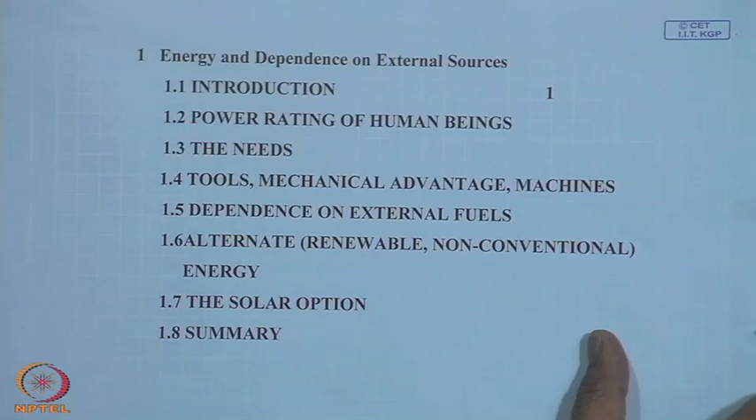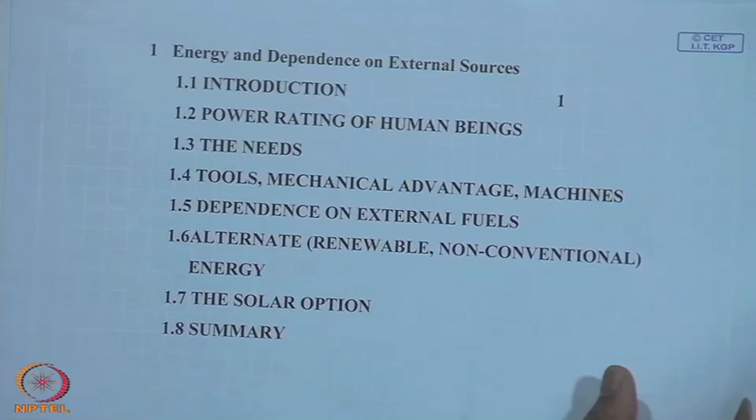Similarly, we define what is meant by alternate, renewable, or non-conventional energy sources, of which solar energy is one option, and why it is promising. We shall have a bit of justification for going through this course and this material, and that is the summary of the first lecture at the end.

So this gives a historical perspective of the oil energy crisis in 1973. It is, in one sense, an energy crisis and an oil crisis, but more a crisis of prices, because the OPEC countries increased the price of fuel, and particularly America and other countries that heavily import oil started feeling the need to develop alternate sources instead of depending only on conventional fossil fuels.

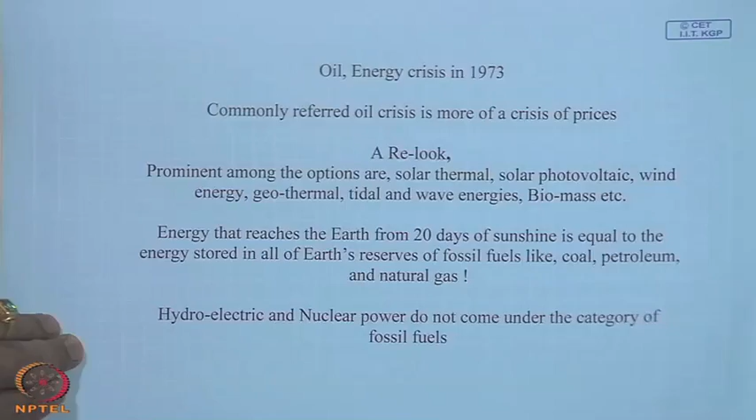Prominent among the options are solar thermal, solar photovoltaic, wind energy, geothermal, tidal and wave energies, biomass, etc. All these were given attention by scientists and engineers. An interesting fact is that the energy reaching earth from 20 days of sunshine equals the energy stored in all of earth's reserves of fossil fuels like coal, petroleum and natural gas. Hydroelectric and nuclear power do not come under the category of fossil fuels, though they have a good share in meeting world energy requirements.

So the crisis is sort of man-made. The best estimates of available reserves tell us they will last 20 or 30 years, though estimates widely vary. This could depend on how much the rate of consumption continues to increase, or whether we decrease our consumption rates by alternate sources or by conservation, leading to a reduction in dependence on fossil fuels.

So there is an intrinsic reason for dependence on external energy sources to meet human needs: food, shelter and clothing. The typical power rating of a human being, for an athlete in a 100-meter sprint, is about 1200 watts, which comes to about 1.6 horsepower. An average human can sustain working for longer duration at about 300 to 500 watts at best.

A quick estimate of the energy required to produce the material needs like food, shelter and clothing of a human being exceeds the energy that he himself can produce in trying to produce whatever he needs.

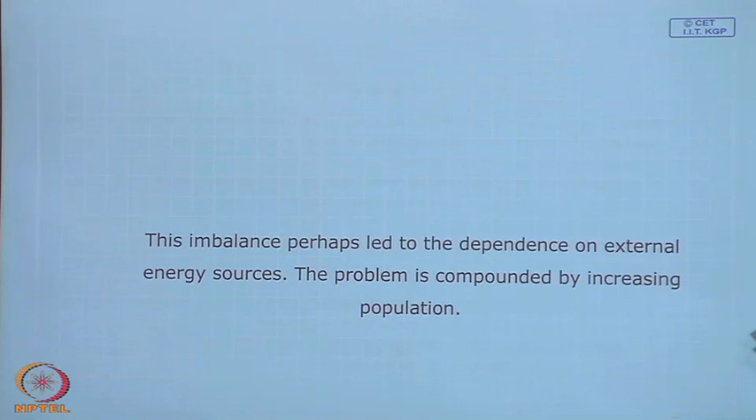Consequently, there is an imbalance. This imbalance perhaps led to the dependence on external energy sources. The problem is further compounded by increasing population, because we have got limited sources and a larger number of people dependent upon that. So consequently, instead of producing this himself, he had to use some power, animal power, machine power.

To make life a little more comfortable, first he invented fire, which made him feel more comfortable even in a cold climate, and also to ward off wild animals. Then subsequently he started using fire for what we call in modern terminology as heat treatment. Then various tools have been invented for use of convenience, including killing animals or protecting himself, up to mass destruction weapons of the present day.

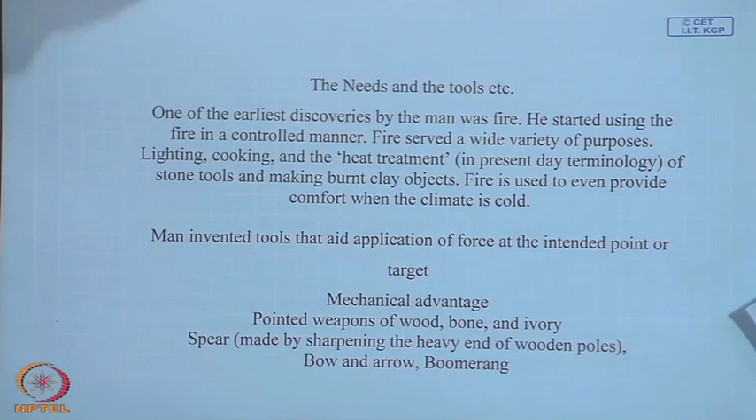And in this process, mechanical advantage has been harnessed. In other words, if you have got the lever principle, you can take a crowbar and lift the earth, provided there is a space to stand and a strong enough foundation to hold the bar.

So pointed weapons of wood, bone and ivory, then a spear made by sharpening the heavy end of wooden poles, bow and arrow and boomerang are the very early tools and weapons that man was using.

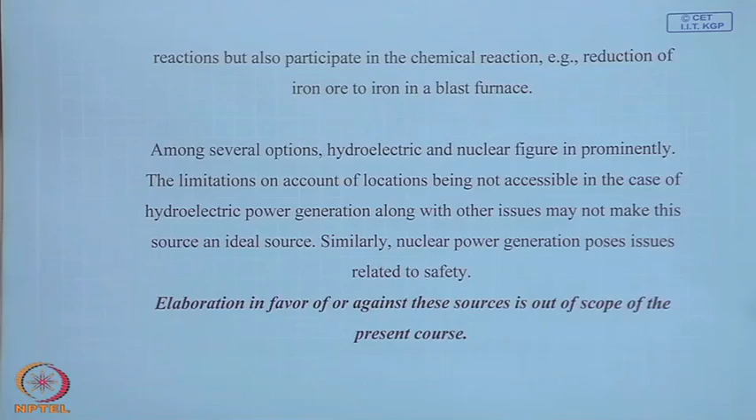This I am particularly mentioning to point out that if the dependence on coal for power generation is reduced, it will be available for a longer period for producing iron and steel. Consequently, there will be a chance to think of new technology which may not depend on coal for producing iron and steel or any other product one can think of.

So hydroelectric power generation and nuclear power strongly occupy a pretty important role. However, they are not easily accessible, not easily available at the location that you need, and there are issues like submerging of the surrounding areas and safety issues as far as nuclear power is concerned.

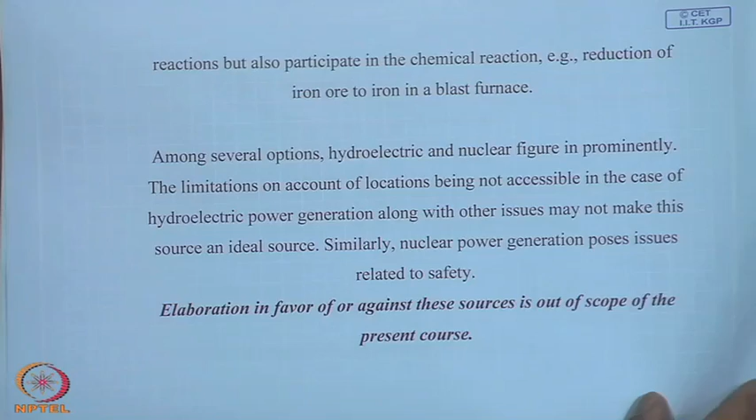Elaboration in favor or against these sources is out of scope of the present course. We will not enter into a debate whether nuclear is better, or hydroelectric is better, or solar is the only option as far as this is concerned. But we do consider solar to be one of the options in trying to reduce the dependence on fossil fuel.

Another approach is to make the processes and machines more efficient and reduce the losses of energy. This aspect may broadly be termed energy conservation, which also involves energy management, waste heat recovery, etc. By this method, if actual dependence on fossil fuel consumption becomes less, then the resources last longer.

It is not essential that you add power generation, but you have reduced your consumption by alternate or efficient means. In fact, I shall give you one example. In the early 80s, any two-wheeler giving something like 40 kilometers a liter was considered a very highly efficient machine, whereas now it goes to 80 to 100 kilometers per liter with the same, or even more, power and comfort. This is because of the direction that research has taken in trying to reduce consumption.

Consequently, you can run two two-wheelers instead of just one two-wheeler as earlier.

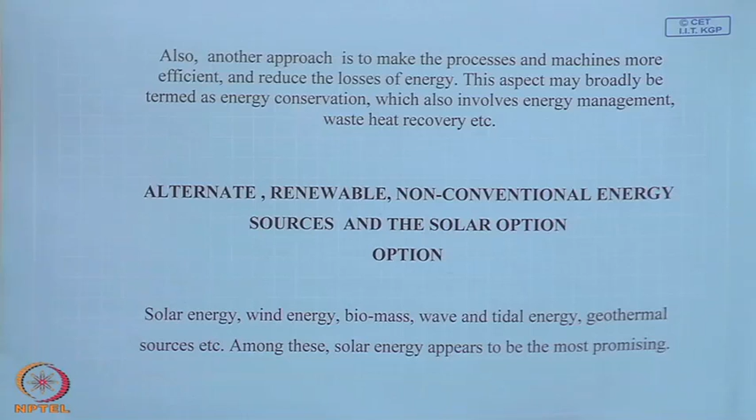Solar energy, wind energy, biomass, wave and tidal energy, and geothermal sources are some of the things being actively considered. Among these, solar energy appears to be the most promising.

It is not that we are giving this course and hence we vote for solar. The distribution of solar energy throughout the world is more or less uniform - it does not favor a rich country or disfavor a poorer one. The second part is it can be fairly predicted. I may not be able to guess the solar radiation tomorrow morning at 7:30 to 8:30, but a pretty good average for a typical day in August can be predicted, calculated, or measured.

Whereas wind energy is more erratic, and at the same time it is mostly available at places that are not easily accessible. Wind energy is a manifestation of solar energy, approximately about 2% of solar radiation. But we should also note wind energy is a high-grade energy source, since it directly provides mechanical power from which you can generate electricity. So wind can also play an important role in meeting energy demand and reducing dependence on fossil fuel reserves.

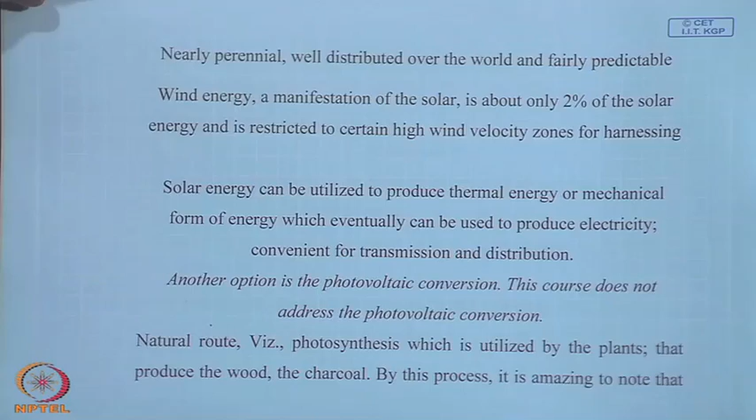Solar energy can be utilized to produce thermal energy or mechanical energy, which eventually can be used to produce electricity - which we take for granted these days because of the convenience in transmission and distribution. If you generate mechanical shaft power, you can't transmit it more than 100 feet even with a very long shaft. Earlier, old workshops used to have a common shaft to which a number of lathes or machines were connected. So that type of thing one cannot think of for kilometers and hundreds of kilometers of distribution.

In the solar route, photovoltaic conversion also exists, where solar radiation is directly converted into electric energy. This course does not address photovoltaic conversion. We will restrict ourselves to solar thermal energy and the various ways of producing thermal energy, mechanical energy, or electric energy.

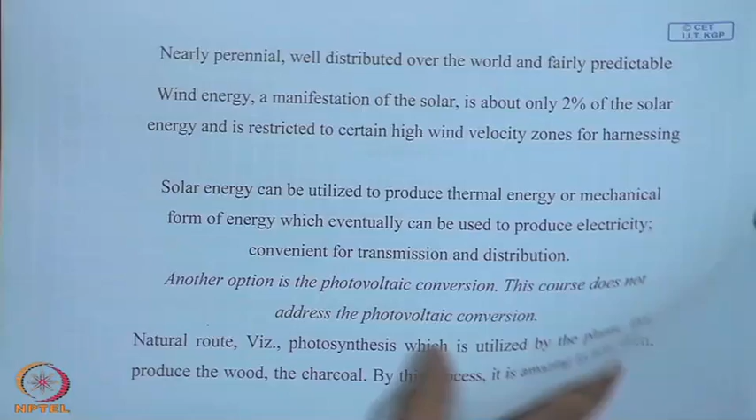The most natural route was photosynthesis, which plants do fairly efficiently - essentially a method of storing solar energy in the form of wood. I was told, and read, that one of the iron and steel companies in Bhadravati in present-day Karnataka ran a blast furnace using charcoal produced by a forest grown around it. The forest area was about 7 acres, and the blast furnace capacity was 500 tons, which is small by modern terminology. Nevertheless, it showed that you cut about 100 trees, plant 100 trees, and with a cycle time of about 5 or 6 years, they become ready for use again.

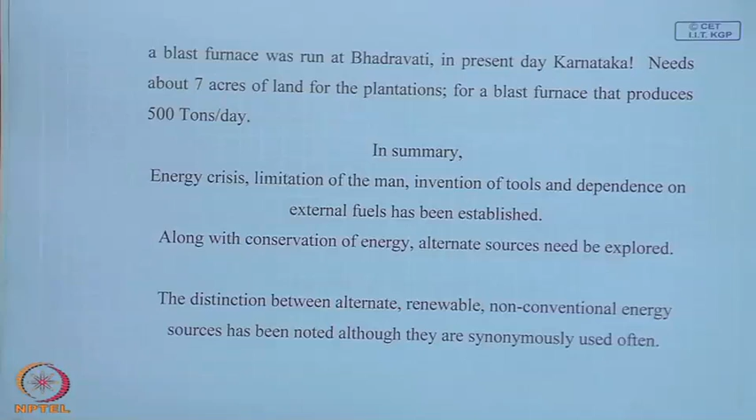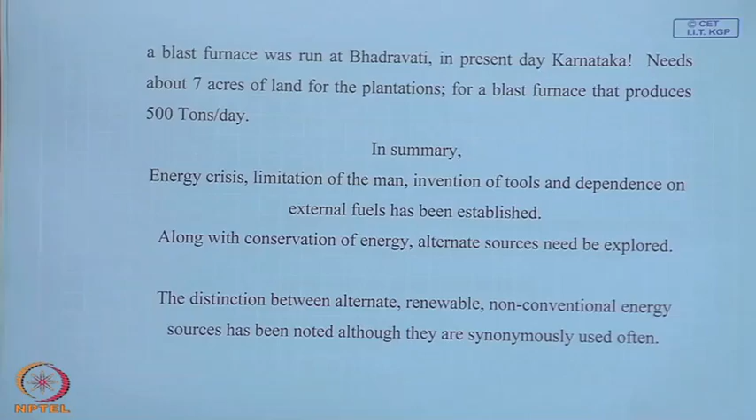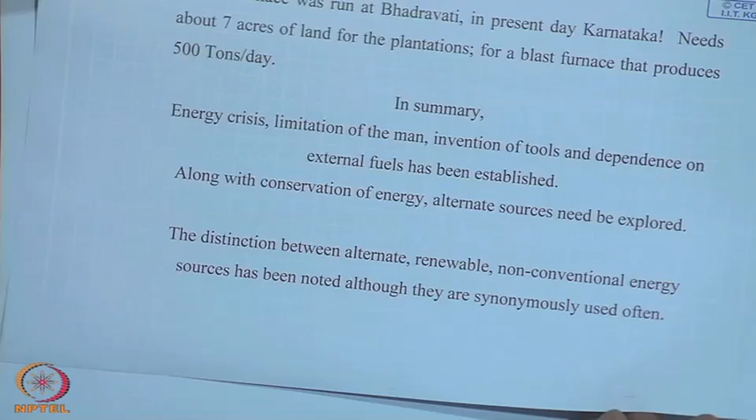So in a way, we might summarize by saying that the energy crisis, the limitations of man, the invention of tools, and dependence on external fuels have been established. Along with conservation of energy, alternate sources need to be explored. The distinction between alternate, renewable, and non-conventional energy sources has been noted, although they are used synonymously many times.

So at the end of this lecture, what we can say is solar energy appears to be a promising option, and this course deals with solar thermal energy generation and utilization.

So, the next lecture will be a shorter one. We shall try to provide the sun's physical description and reactions.

There is a good case to reduce the use of fossil fuels and explore alternate energy sources, and solar seems to be a good option. From a thermodynamic point of view, in no process is energy consumed or lost; the form of energy changes from one form to another. Only the quality or grade of the energy deteriorates.

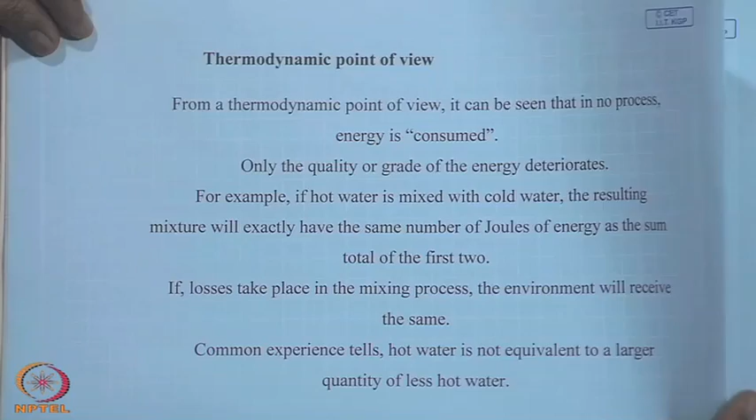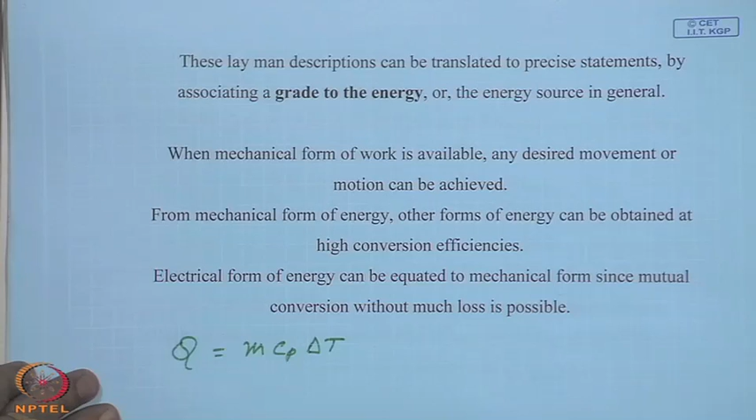Common experience tells us hot water is not equivalent to a larger quantity of less hot water. If you calculate m into specific heat Cp into delta T, where temperature is with respect to some reference temperature, Cp is the specific heat, and m is the mass of the water, I can convert this into less cold, less hot water containing the same amount of joules, with m increased and delta T decreased.

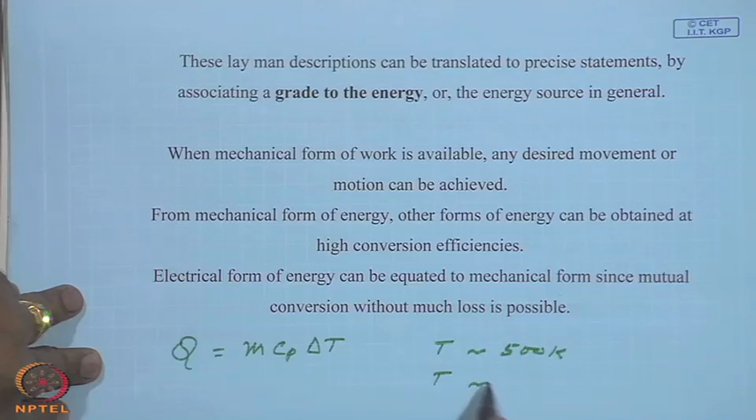But at the same time, if I have T at 500 Kelvin, the capability of the hotter fluid is higher in converting into mechanical energy rather than that of the colder fluid.

So whatever we are saying as less cold and more hot, these layman descriptions can be translated to precise statements by associating a grade to the energy source. We might qualify them as high grade or low grade sources. Wind energy is a high grade source, hydroelectric is a high grade source, and nuclear, though it is a thermal route, is also a high grade source, because the temperature at which the reaction can be maintained or steam raised can be very high. Now if you look at solar energy, it is typically a diffuse source of energy.

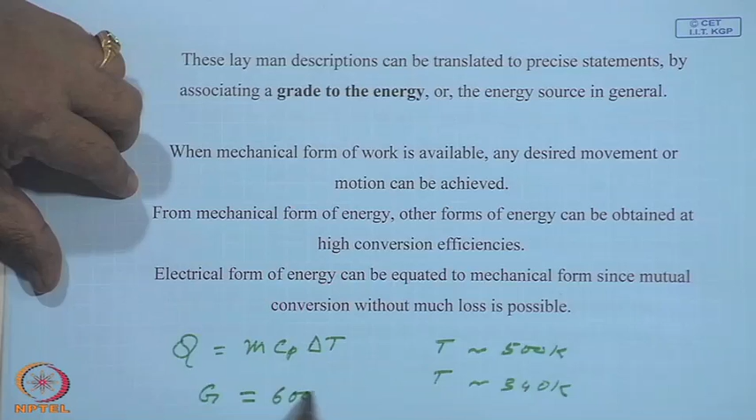You may have G of about 600 to 900 - the intensity of solar radiation that you receive typically during the better part of the day, not early morning, not cloudy days: 600 to 900 watts per meter square. Multiplied by the surface area of the earth, it is quite a lot, but 600 watts is small; typically a boiler will have about 3000 watts per meter square of heat flux. So compared to that, this is only 1/5 or 1/6, and in addition you have intermittency - it will not shine all 24 hours.

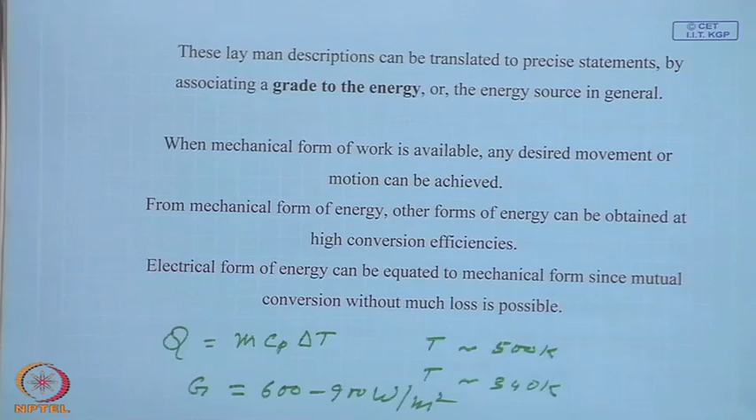When we talk about mechanical form of work, most of the time any desired movement or motion can be achieved in the direction that you want. If you have shaft work, I can make it move a wheel, or move another reciprocating mechanism and produce an ordered, directed movement. From mechanical form of energy, other forms of energy can be obtained at high conversion efficiencies.

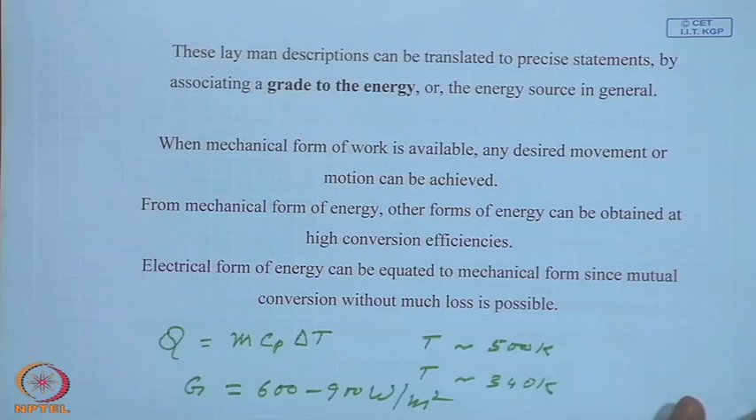Now, why we talk about mechanical form and not just thermal form is that once you have mechanical energy, you can produce electricity with a reasonable efficiency of 90 to 95%. Once you have electrical energy, mechanical energy can again be produced with high efficiency, and also thermal energy at the temperature you desire can be produced at high efficiency. But the reverse is not true.

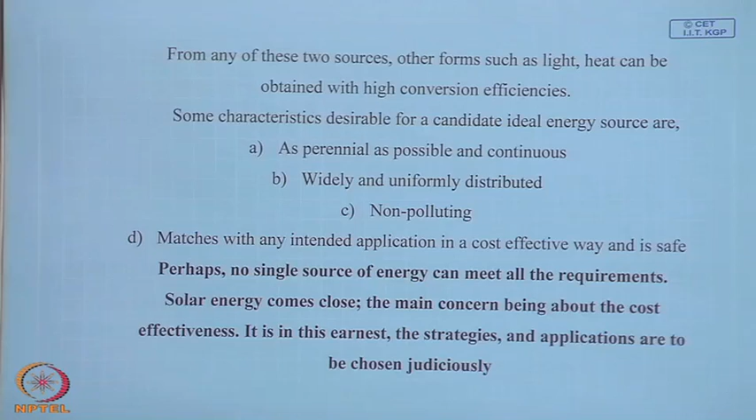So now if we ask ourselves what are the ideal characteristics that we would like to have for a new energy source: we would like it to be as perennial as possible and continuous, widely and uniformly distributed, and non-polluting. By being perennial, as long as man exists, the energy will be available. If it is continuous, I do not have to store the energy in any form. And if it is widely and uniformly distributed, I can set up a power producing plant anywhere I want.

It should also be non-polluting, which is a serious issue these days with the number of vehicles increasing and power generating units increasing.

The other thing you would like is that it matches any intended application in a cost effective way, and that it is safe. So if I want to produce, say, hot water, what is the cost of the hot water produced if you use solar? Similarly, if I want to generate mechanical or electrical power, what will be the cost of the system? Because the moment we talk about electric generation, you go to a higher temperature source, and that may be less efficient from a heat losses point of view. Consequently, the cost will be entirely different compared to using a solar collector just to heat water up to 60 degrees centigrade.

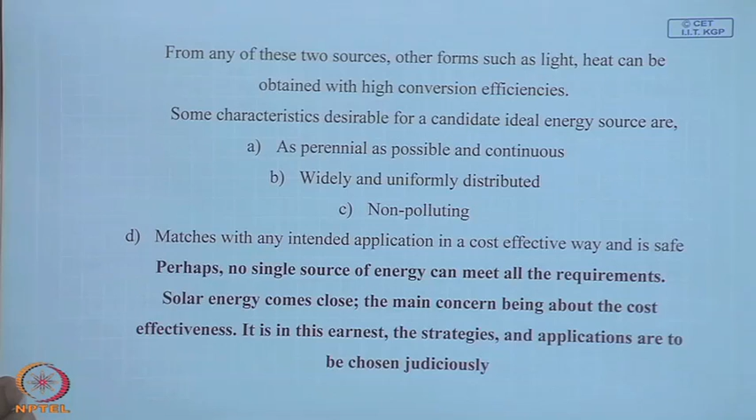For example, if you take a tropical climate like India, water heating is not a burning problem, in the sense that you would like hot water only for 3 or 4 months in winter. Most of the time you need cooling instead, which is again a high grade application if you try to provide air conditioning.

Whereas if you go to a cold climate, typically at high latitudes like the northern USA or Canada, the ambient temperature is about 10 or 11 degrees, or even sub-zero. So if you want to provide a house at 20 degrees C and water at the tap at 20 degrees C, it requires a lot of heating from the ambient temperature, which is normally set by the government as the mains temperature. Unfortunately this type of application we cannot have everywhere, but there may be other fortunate applications where heating is not the problem, cooling is the problem.

We will come back to this in detail towards the end of this course. A lot of solar energy research has gone on during the last 3 decades, with some demonstration plants being successful and some not so successful, including applications like water heating, the greenhouse effect, and solar cookers, which are all popularly used.

At the same time you have to be concerned about why solar energy is not being widely used in all parts of the world. One issue is that if you look at the type of work going on, people classify it sometimes in a light-hearted manner as 'solar' application and 'non-solar' application. That means you use solar energy for generating energy, which you call solar.

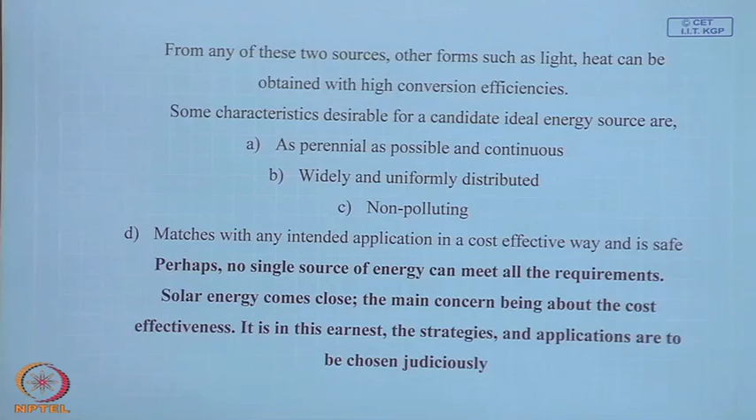Another simple example is cold storage. Ideally a cold storage is maintained at a certain temperature, and if you can reduce the solar radiation falling on it by choosing the length, width and height dimensions properly, that serves the purpose.

Say for example, the height should be a minimum of 6 feet, whether it is south facing, north facing, or whichever side has more area. Thereby, you can reduce the total amount of solar radiation received by the cold storage, and thereby reduce the cold storage requirement on the air conditioning or cooling load.

So some of these calculations have become available with the advent of better methods and better algorithms.

A little bit about the sun.

The sun may be considered as a sphere of intensely hot gaseous matter with an average diameter of 1.39 into 10 to the power 6 kilometers, and it is at an average distance of 1.495 into 10 to the power 8 kilometers from the earth. The sun is in effect a continuous fusion reactor, and we on earth try to simulate fusion reaction, but unfortunately the success is limited because we cannot contain the high temperature plasma in the containers of materials known to us.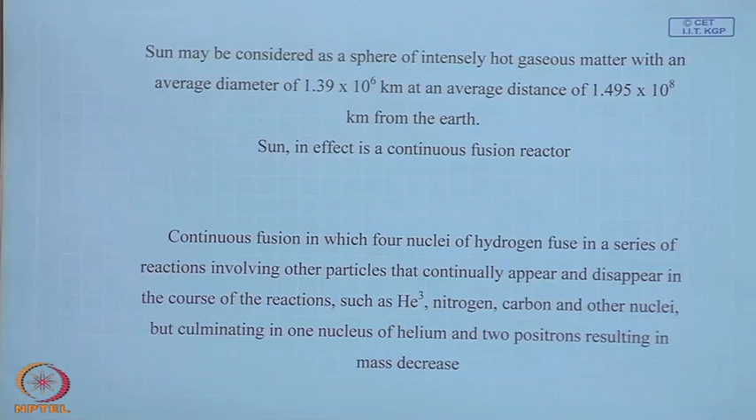In the continuous fusion, 4 nuclei of hydrogen fuse in a series of reactions involving other particles that continually appear and disappear in the course of the reactions, such as He3, nitrogen, carbon and other nuclei, culminating in one nucleus of helium and 2 positrons, resulting in a mass decrease.

So when this fusion reaction occurs, there is a reduction in the mass, and that reduction in mass is converted into energy.

About 0.0276 atomic mass unit of mass deficiency corresponds to 25.7 million electron volts. The name is very profound, million electron volts, but the quantity of energy denoted by MeV is actually very small.

The heat produced in these reactions maintains temperatures of the order of several million degrees in the core and serves to trigger and sustain succeeding reactions.

One atomic mass unit is, for your information, 1.6604 into 10 to the power minus 24 grams, and the rate of conversion is according to Einstein's relation E equals mc squared, where c is the velocity of light, 2.998 into 10 to the power 10 centimeters per second.

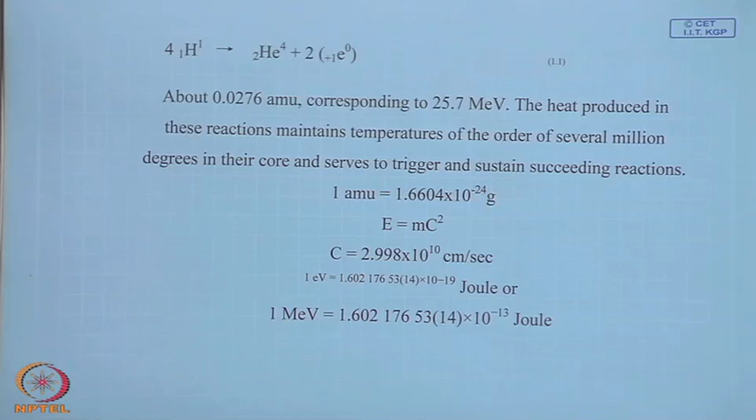One electron volt is of the order of 10 to the power minus 19 joules, or 1 million electron volt is of the order of 1.6 into 10 to the power minus 13 joule. So the so-called million electron volt is a very small amount of energy.

However, the fusion reactions or fission reactions in nuclear reactors occur plenty per second, producing sufficient energy.

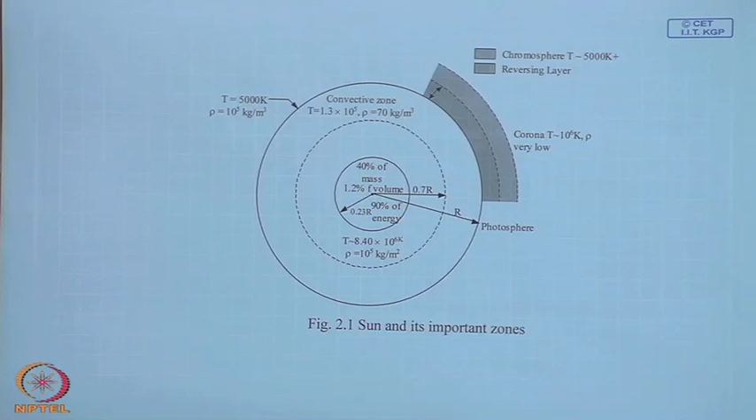This is a schematic representation of the sun. About 90% of energy is produced within 0.23 of the radius, occupying about 1.2% of volume, but containing 40% of mass at the center. There is the corona, a reversing layer, a photosphere, and a convective zone, and effectively the sun is at about 5000 Kelvin.

In other words, it is not that we have measured the temperature by any thermocouple or thermometer taken near the sun, but effectively by virtue of the solar radiation received on earth, if you back-estimate, the effective temperature turns out to be 5000 Kelvin.

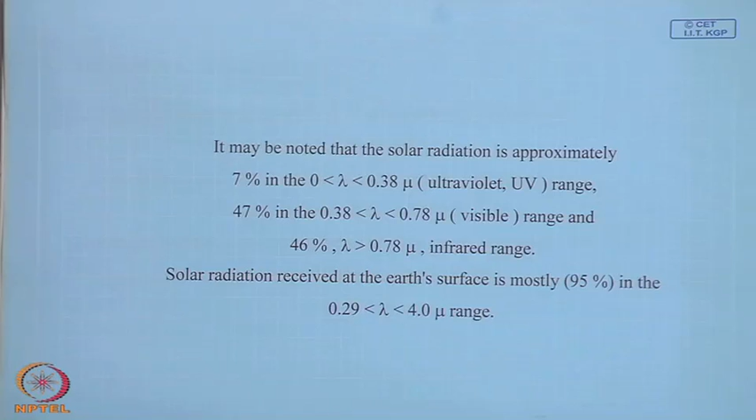7% is between 0 to 0.38 microns, which we popularly call the ultraviolet, and about 47% is in the range of 0.38 to 0.78 microns, the visible range, and about 46% with lambda greater than 0.78 microns is the so-called infrared range. Solar radiation received at the earth's surface is mostly in the wavelength band 0.29 to 4 microns.

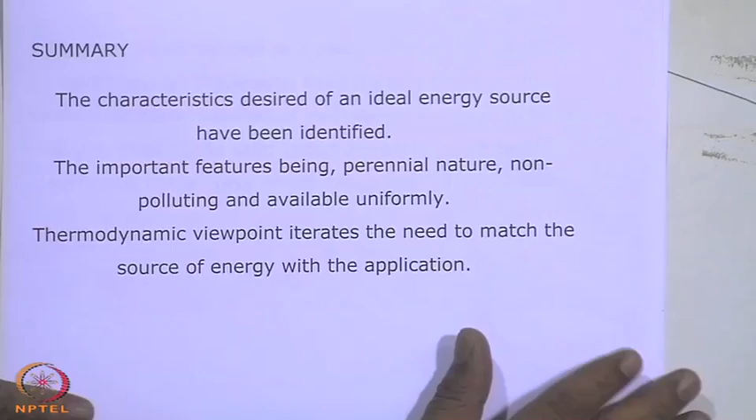Interestingly, this visible range is what is utilized by photovoltaics. So though photovoltaics produce direct electric energy, only part of the solar radiation spectrum is available for it to convert into energy. That is one thing we have to take into account when we calculate the efficiency of a solar energy device working on the photovoltaic principle.

So what we have done in this part is give a little glimpse of what the sun does. It is basically a fusion reaction producing energy in a particular wavelength range, and what we receive on earth, and the characteristics desired of an ideal energy source have been identified. The important features being perennial nature, non-polluting, and available uniformly. The thermodynamic viewpoint iterates the need to match the source of energy with the application.

So this I have not elaborated, but it will be interesting to know how many of you know at what temperature you take your bath, hot water bath.

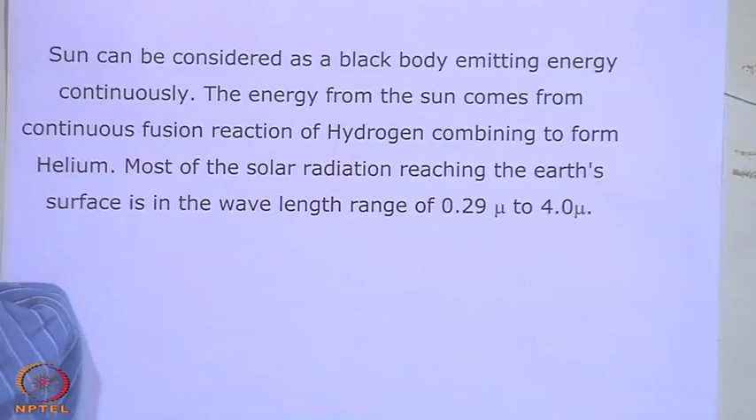I know previous classes people came out with answers ranging from 50 degrees to 60 degrees to 45 degrees. But the fact is you use about 5 to 6 degrees above body temperature, 41 to 42 degrees centigrade, and the skin cannot sustain more than 45 degrees C. Do not think that you take bath at 60 degrees C.

But invariably there is a small moral I want to draw. You produce hot water in a geyser or even the conventional method of heating at about 60 degrees or more than 60 degrees, then mix it with cold water to bring it to 40 to 45 degrees centigrade. In thermodynamics language, this is entropy generation. So you are taking high grade energy at 60 degrees and converting it into lower grade energy at 45, 42 degrees. So if you need hot water at 45 degrees, just heat it only up to 45 degrees centigrade.

Of course, there are economics issues which you have to study, which in the course of time we will find out what is important. If you have water at 45 degrees centigrade, then the tank size will be larger, and your economics will be affected because of the size of the tank. Now it is an issue whether the heat loss will increase because of the surface area of the tank or decreases because the temperature is lower. So though it is a very simple example, it can be set mathematically to find an optimum size of the tank and optimum temperature at which you generate the energy.

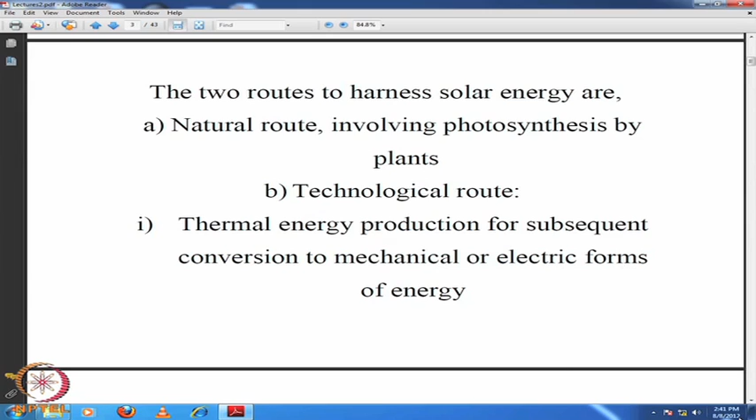In harnessing solar energy, we have two routes. One is the so-called natural route, which plants implement by the process of photosynthesis and store the energy in the form of wood, which can later be used for a number of applications. The technological route involves thermal energy production for subsequent conversion to mechanical or electrical forms of energy, and also photovoltaic conversion, where electric energy is directly produced from solar cells. Both technological routes have shown promise, and suitability of one over the other depends upon the specific application.

If we, for example, consider a remote area for communication purposes etc., solar cells appear to be a good option. Similarly, for remote villages where lighting is required, solar cell operated systems also appear promising, whereas there are a large number of systems based on thermal energy that have been established throughout the country for production of hot water, production of steam, and even power generation.

As I was pointing out last time, basically the idea is we have to match the source of energy to the application. The example I was talking about was simple taking of bath with hot water - as a matter of fact you use water around 40 to 45 degrees centigrade, and most commonly it is heated up to 60 degrees and then cooled, which is a wasteful, entropy generating process.

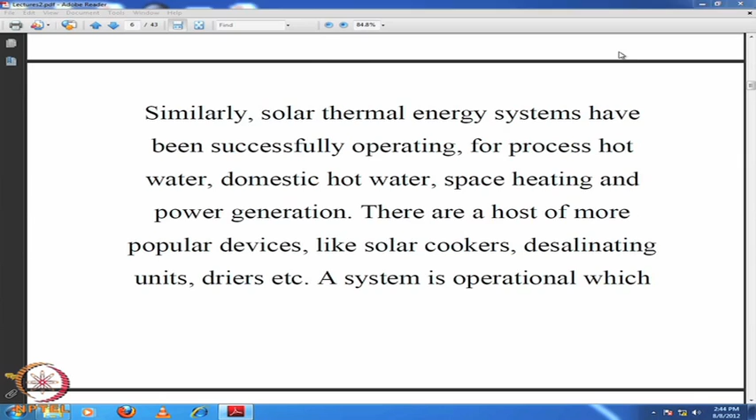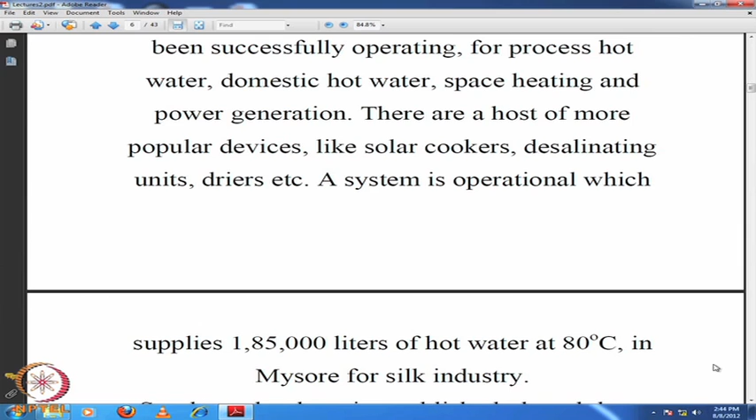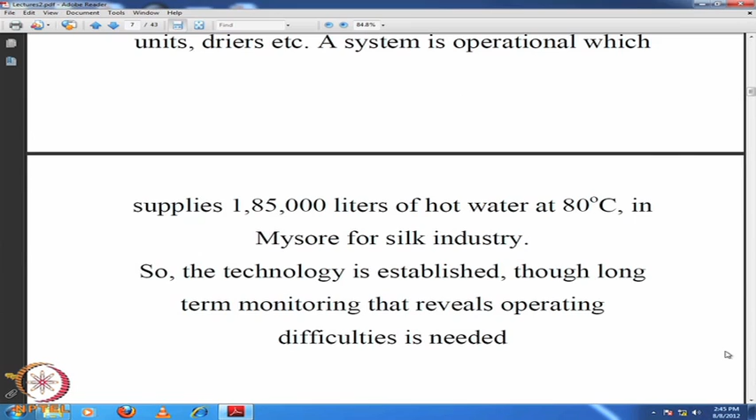One of the operational systems in India supplies about 1,85,000 liters of hot water at 80 degrees centigrade in Mysore to meet the requirements of the silk industry. So the technology is established, though long term monitoring that reveals operating difficulties is needed.

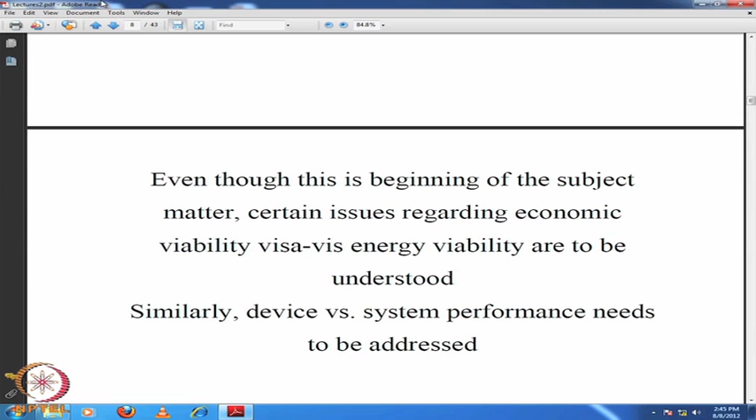Before you appreciate the subject and the difficulties, we have to carefully distinguish between economic viability and energy viability. Most of the time, the energy saved by producing hot water or power generation by a solar energy system or any other system is compared with conventional energy sources, and if the payback period is reasonable, like 2, 3, or 4 years, we call it economically viable.

However, there is one basic issue: economics and cost in general is somewhat artificial. For example, LPG is subsidized, and if you compare it with the cost of petrol, there is no reason why LPG should be less costly than petrol. So if you analyze a system based upon LPG, it appears economically viable, but in reality the price is paid by someone else.

A more basic issue is that if you have an energy system which makes use of materials like steel, copper, aluminum, glass, or insulation material, that material itself consumes a certain amount of energy in producing the article. So in its own lifetime, unless the system saves as much energy as was used in producing the material, regardless of economic viability, chances are we are going towards bankruptcy faster as far as energy dependence on other sources is concerned.

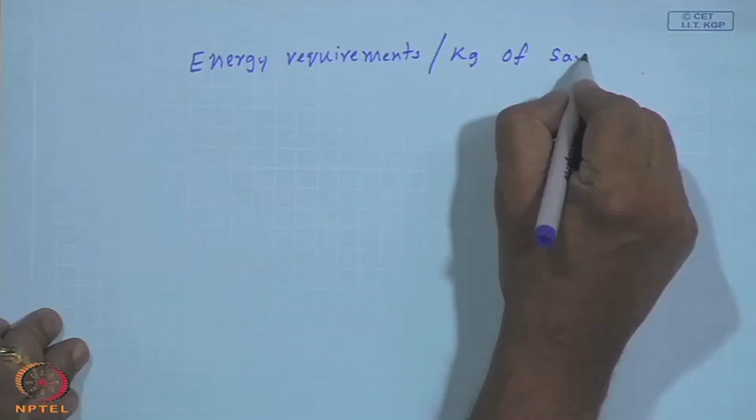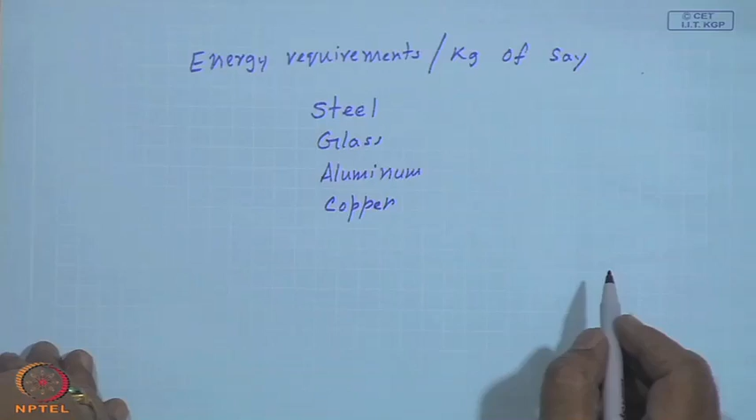These are the materials that are commonly used in various solar applications, and in fact in a number of other applications. So it is worthwhile knowing the energy consumption per kilo of the material produced.

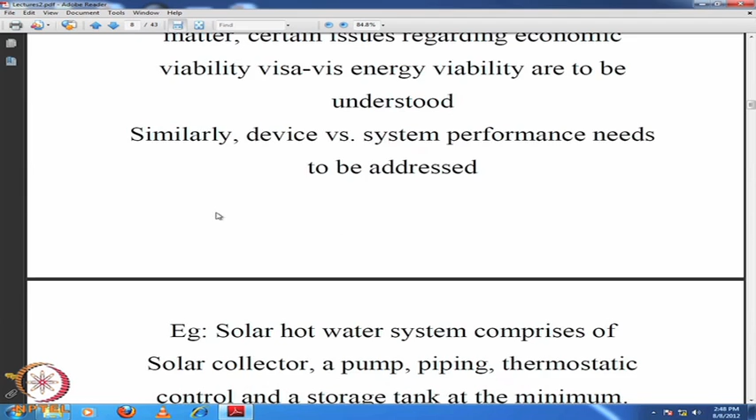Again, we try to make a distinction between a solar device and a system. This has not been sufficiently emphasized in many of the books that are available.

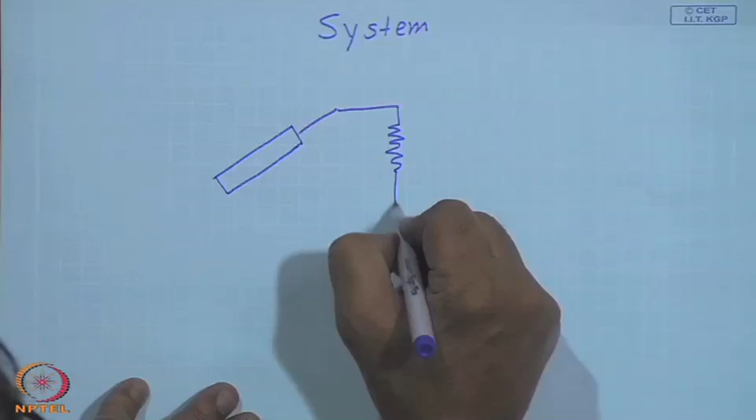If you are talking about even hot water production, the simplest system one can think of will comprise a solar collector, from which hot water goes to a tank exchanging energy. You may draw the water through a heat exchanger, so the fluid need not be only water, it can be any other heat exchange fluid. You may add even an auxiliary to make up for the quality or quantity of water required. There will be a pump circulating water into the solar collector, or it may operate on a thermosiphon system.

You may have a control which measures outlet temperature and inlet temperature, and operates if To is greater than Ti; otherwise the pump is shut off. Of course you can't have a perfect control, so there will be a bandwidth, accepting outlet temperature plus or minus 5 degrees or 3 degrees, depending on the accuracy of the control unit.

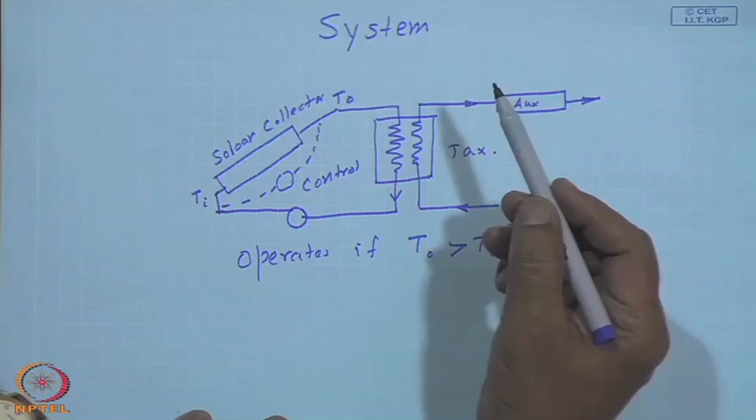Even if you consider the simplest conceptual system like this, the delivery temperature, ultimately before or after the auxiliary, will depend on how effective the heat exchanger is. Similarly, if the control is ineffective, it may throw out a lot of cold water, or if it is too stringent, it may not send water in unless the temperature increases much more than the required set temperature. One can also expect failure of the pump.

Now this is an auxiliary tank. Just to give an example: somebody designs for a family of 4 that about 60 or 120 liters of hot water are required per day. So solar collector sizing was found to be about 3 square meters roughly, and the pump and everything was put in place, but they forgot to put in the tank. So unless the requirement matches the solar radiation, taking little water in the morning when the sun is not so hot, and more water around 12 o'clock, only then can the utility of the system be felt.

But if everyone wants to have bathing between 8 and 9, there will be no water available. However, if you put the solar energy tank, the water collected the previous day is available in full to you on demand the next day.

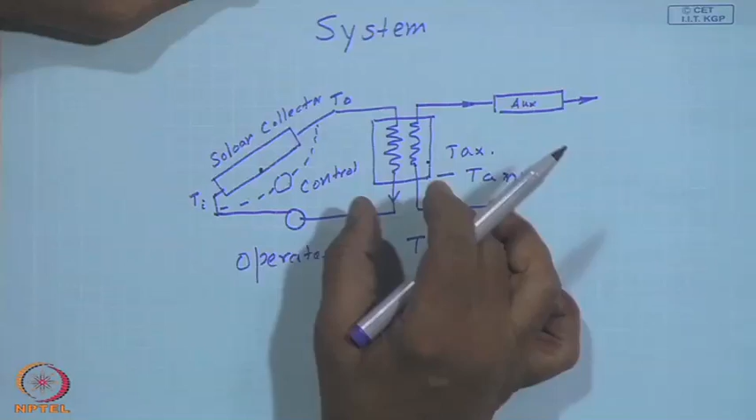Then the sizing issue of the tank comes, those are all details, but the effectiveness of the entire system will not only depend upon the so-called collector efficiency, but also on the combination of the components that are put in. This is one part which this course tries to emphasize, the system versus device component. So the matching of the components in the entire system along with the collecting device and the conversion device is an equally important task.

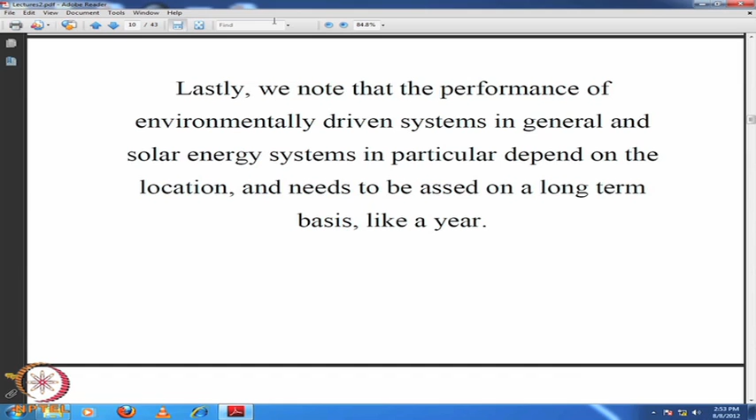Now, we might categorically say the performance of environmentally driven systems is a collective term given for wind energy systems, solar energy systems that depend upon the environment in general. Solar energy systems in particular depend on the location and need to be assessed on a long term basis, like a year.

Depending on the location, say for example if you have got a fan, as long as the supply voltage is 220 volts, whether it is put in Kharagpur or Madras or New Delhi or somewhere abroad which operates on 220 volts, it will give exactly the same performance. Whereas the same solar energy collector will not give the same output if it is operating in Chennai and if it is operating in Delhi.

So if you want to size the system, you have to know the local meteorological features, and consequently the performance of the overall system is highly location dependent, making it not possible to have a unique design for every system and every location. That is what makes the subject interesting as well as challenging.

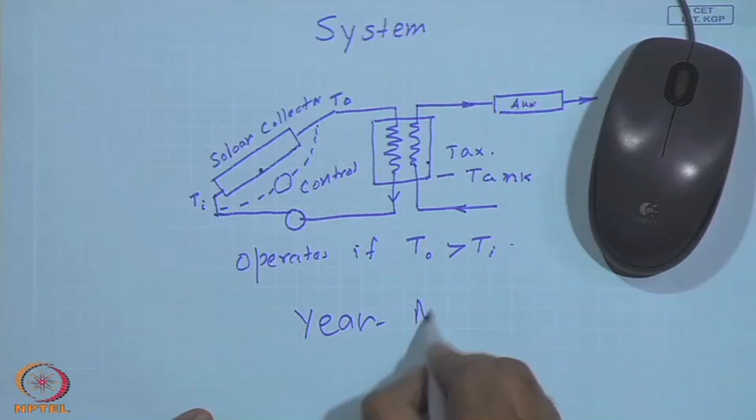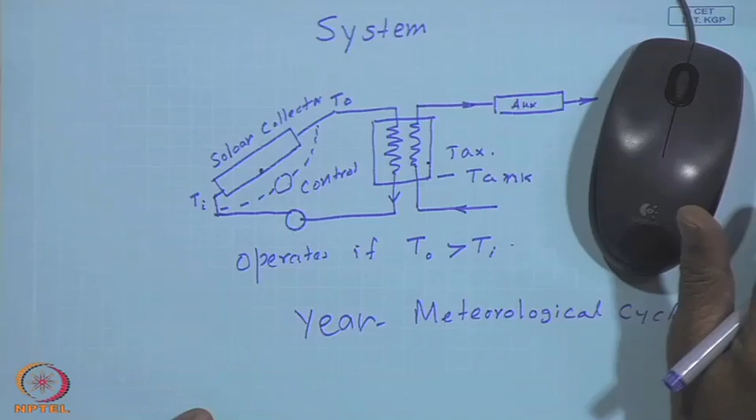Now, the other thing I was telling, a long term basis like a year, particularly for solar energy systems, a year is chosen because the meteorological cycle repeats every year. Though January 1st may not be identical to the next year's January 1st, the fair amounts of averages are reproduced. Consequently, whatever is the output that you expect in a typical year can be predicted with good enough number of simulations over a long term average meteorological data.

Not only that, invariably your economic analysis also is based on yearly analysis, consequently long term performance becomes necessary.

Just to emphasize this point again, if you have got a particular solar collector and your requirement is, let's say, 60 degrees centigrade water, if you operate it in the month of December, you may have to heat it from 15 degrees to 60 degrees, whereas if you operate in summer, it may be 35 degrees to 60 degrees, ambient temperature being the inlet temperature. So delta T is almost one half in summer compared to what it is in December.

In addition, you have solar radiation increase by at least one third from December to June. So if you size for meeting 60 liters of water at 60 degrees in December, it will be a grossly over-designed in June. At the same time, you have to make a compromise. In other words, equal additions of area will not result in proportionately higher increase in the overall yearly production. So that is where the nonlinearities come into the picture, which also gives us an opportunity to optimize.